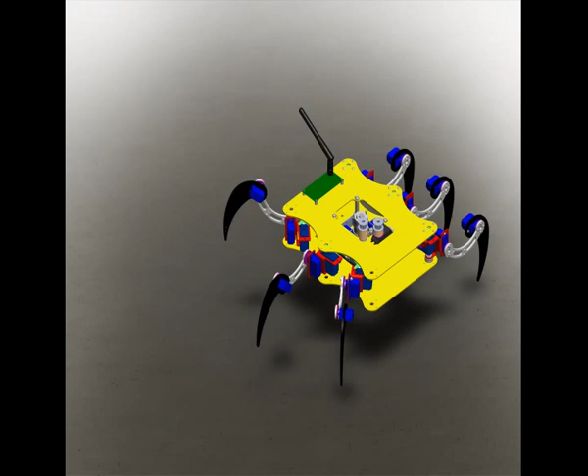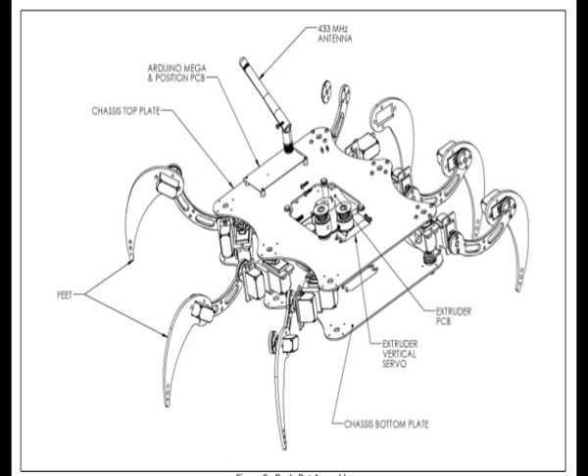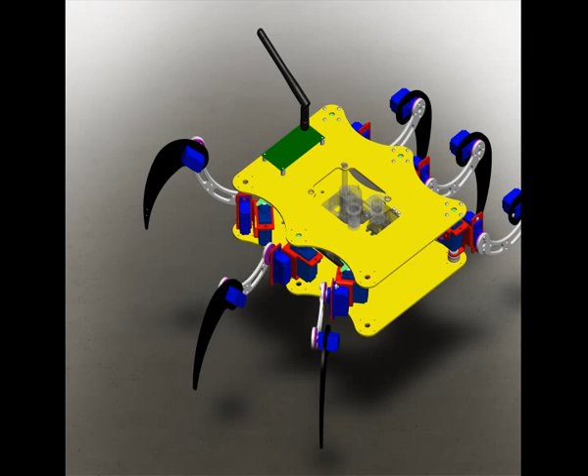It has an Arduino Mega as its controller, soldered to a shield board of my own design. The spider is based on Vlad's Hexabot, a design I grabbed off the net at GrabCAD. I've modified it to make it a bit stouter and added thrust bearings to the rotation axis of each leg.

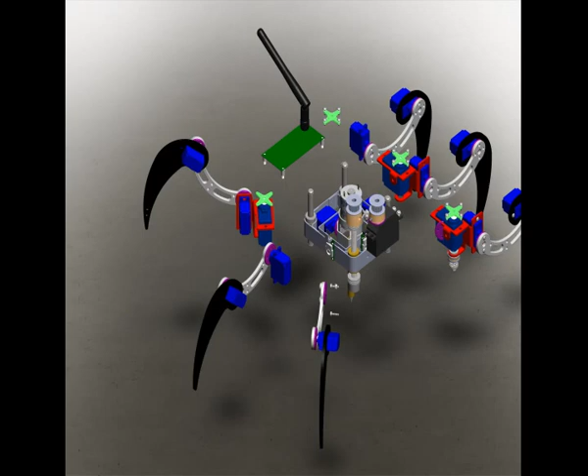This extruder is of my own design. It attempts to address several problems seen in the regular RepRap type glue gun extruder. It has a vacuum jacket to save power, and it has an internal screw to provide positive, more controllable feed to the filament. Heat is provided by a Kapton foil heater, not a cartridge heater.

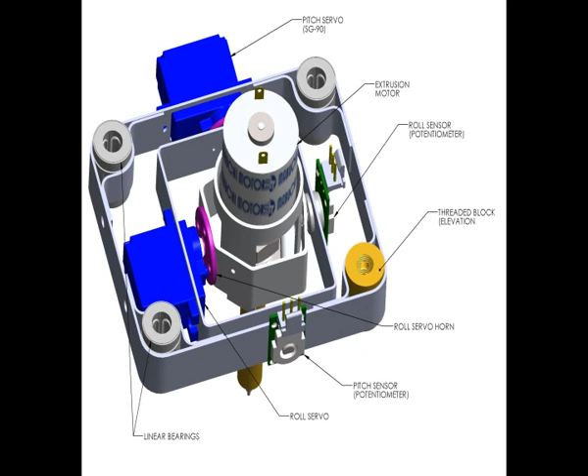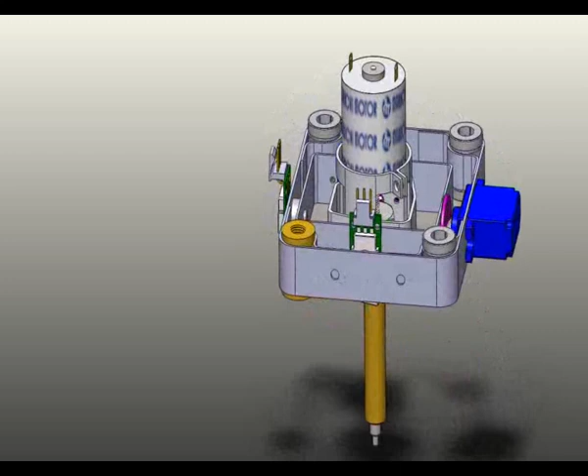The extruder assembly is mounted in a nice little motion table of my design. I'm quite proud of it. That allows rotation of the nozzle in pitch and roll and translation of the nozzle up and down. The entire subassembly has 3 degrees of freedom. When combined with the motion range of the spider, the nozzle has lateral X and Y motion as well, making 5 degrees of freedom for the extrusion nozzle. That permits the BuckyBot to build in any plane, not just the single plane of a tabletop 3D printer.

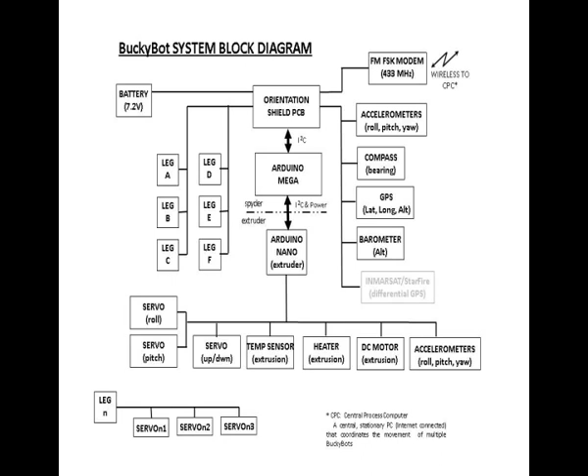Okay, let's talk about the electronics in more detail. That Mega shield board has GPS, magnetic compass, barometer, 3-axis accelerometers, and an FM FSK modem, all on the I2C bus. It handles the servos for locomotion, communicates with central PC, and communicates with the extruder.

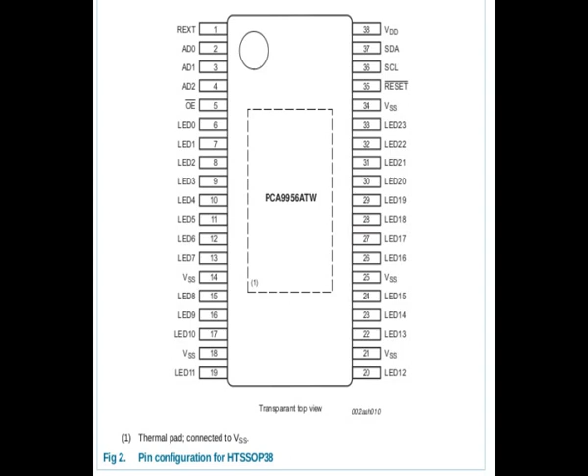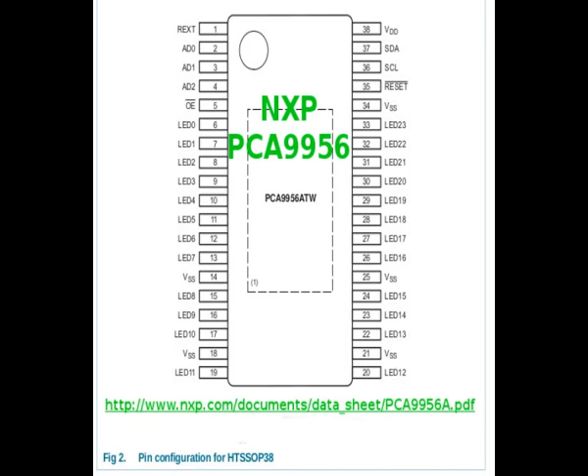All 18 leg servos are controlled by an LED controller, capable of putting out 24 concurrent PWM streams. All the Arduino does is write to that chip's registers over the I2C bus to set each servo PWM duty cycle. The Arduino does not have to produce any native PWM signals on its own. Consequently, all those servos appear to move simultaneously, not serially.

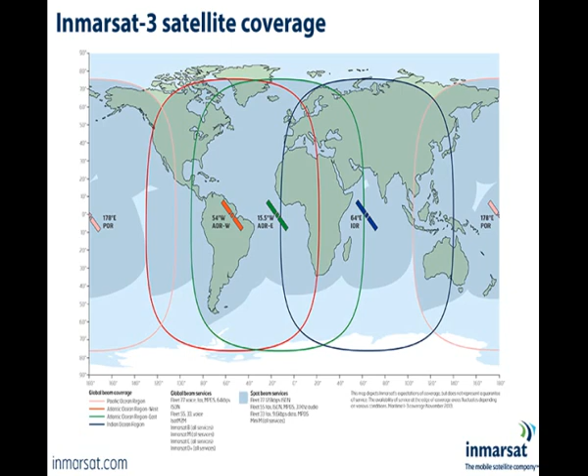We intend to eventually do an Inmarsat hack to get the free StarFire data that will allow the shield board to do differential GPS and report its position to the central PC down to about 10 centimeters. And by the way, that central PC is meant to track and coordinate movement between multiple BuckyBots over their FM links. It's connected, allowing web access for everybody to check on build progress, and maybe even allowing the public to influence the build in real time.

And that might be an invitation to disaster, but it could be done. Can you imagine replacing Buckminster Fuller's Manhattan Dome with a mile-high bust, say, of Stephen Colbert?

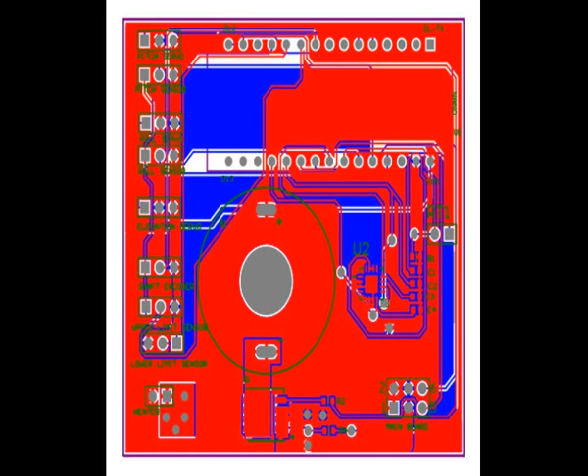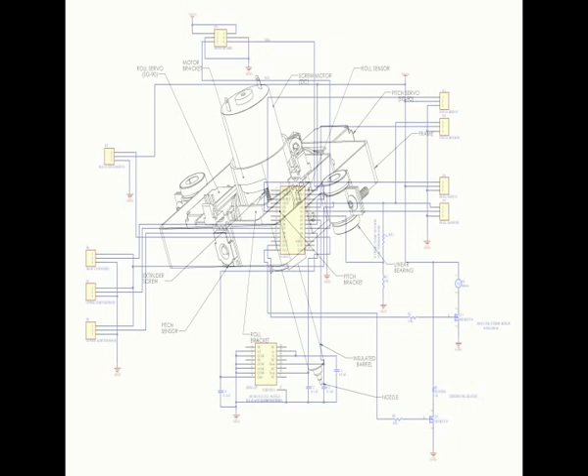Okay, the extruder is controlled by its own Arduino Nano, again with its own shield board of my design. It communicates with the Mega on the spider over the I2C bus. This board has its own 3-axis accelerometers to provide feedback to the Mega about the pitch and roll of the extruder. It controls the nozzle heat by PWM, reads the nozzle temperature by measuring the thermistor, and controls the extruder's screw speed and hence the extrusion rate by another PWM output.

The vertical translator has an optical encoder that provides position feedback. And finally, the Nano runs the continuous servo that powers the threaded rod that, in turn, raises and lowers the extruder.